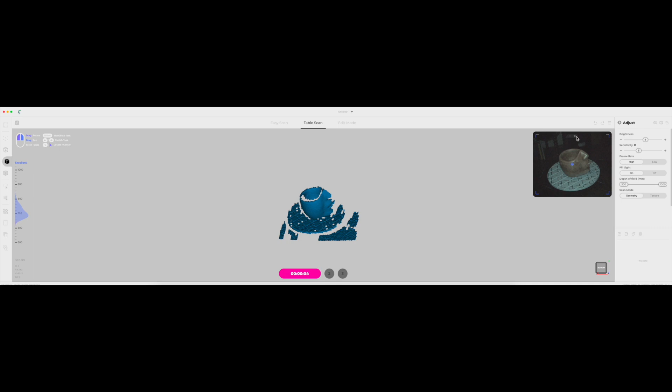All right, this is Creality's CR Studio. When you first bring it up, you want to go into Table Scan, then hit Preview. This will give you an idea of what the scanner is seeing. You want to go ahead and adjust your camera - you can zoom in a little bit, but you adjust the camera or the scanner until it fits right in the center of what you're scanning. So this gives you a preview of what you're looking at.

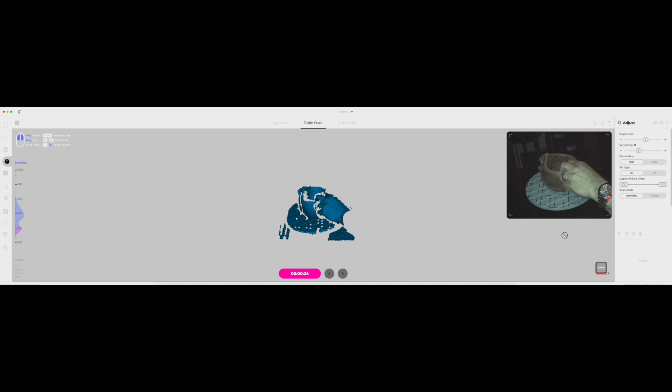Once you got that comfortable, you like what you're looking at, make sure it's centered on the turntable, then go ahead and click stop, or click the pink on the preview, and it will stop it. Then you reach over and take the object off the turntable, and then you click initial.

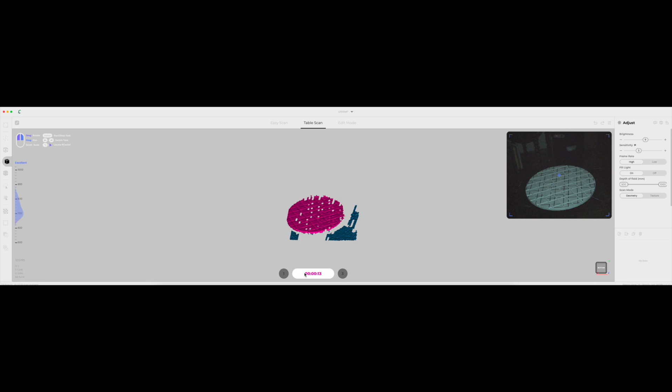What this does is scan the turntable and anything around what your object is. You want to run this scan for like 20 seconds - sometimes it'll do 10 seconds all on its own if it's got a good picture, it'll go ahead and shut off the initial scan. But if not, after 20 seconds you can go ahead and click on it and it'll stop it.

Then what you want to do is put your object back on the turntable, and now you're ready to go ahead and scan. So you click scan, and it'll do 320 frames of the object that you're scanning.

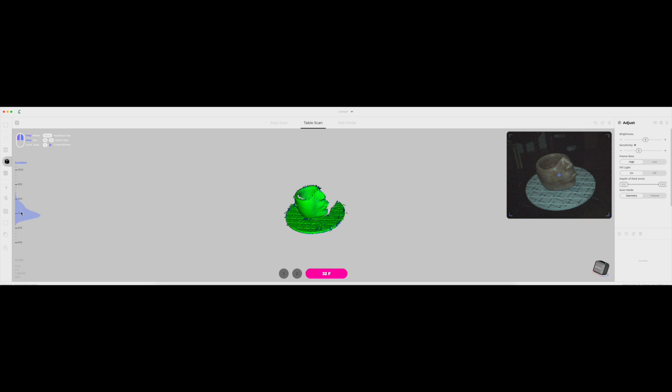Now, if you notice on the left, that tells you whether you're too far or too close. It'll say too far or too close, and then you just go over and manipulate the object until it's right where you have excellent. You do that during the preview process - that gives you a chance to get everything in place.

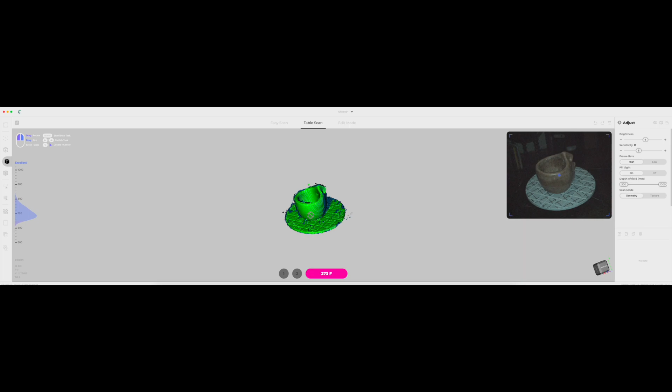Once you hit your 320 frames, you're done with your first scan, and it will stop on its own.

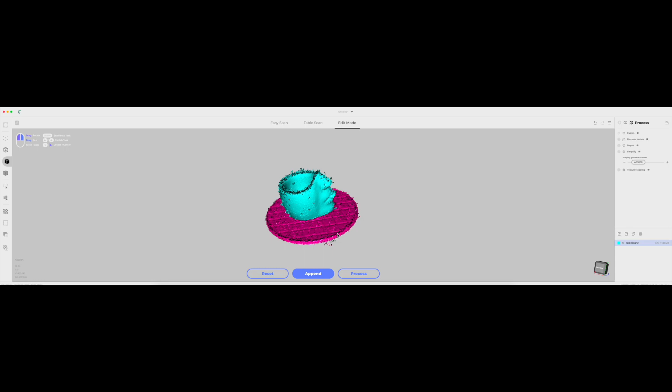Now we'll go ahead and process that scan. You can leave it alone and say I'm done, but if you have a complex object like I'm doing, where it has a void or a hole in it, you can click on append, and what that does is allow you to do multiple scans to pick up all the sides.

You can see as I'm tilting it, there's a hole in the bottom. Now we need to scan that, so we hit append, and it goes back to preview. You can go through the preview if you want and make sure everything's good, but then set your object kind of on its side, and then go ahead and click scan. What this does is scan the same object just in a different orientation.

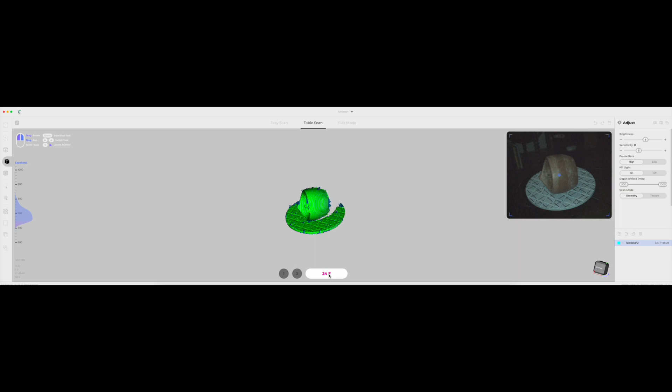Now you can see I got the object on its side, and now the turntable is going to start turning, and I'm going to do a full rotation, or 320 frames, of the object on its side.

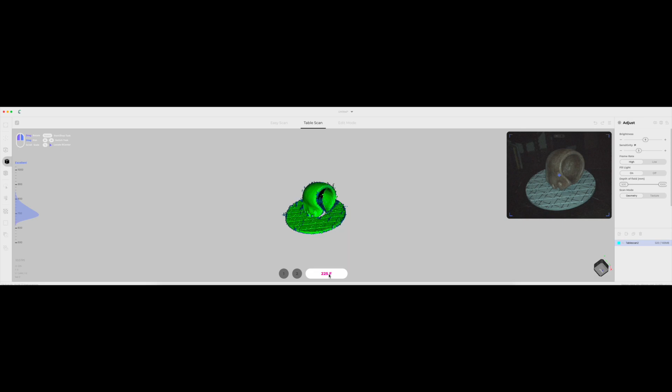Now you saw in the very beginning how I had the scanner up on a tripod kind of high. The problem is when you do that, you can see the top portion of this pot in that void - it's not going to get. It's going to get right here where the back of the face is, but it's not going to get the other side. So once you get 320 frames done, it'll build again.

Now take your pot or your object and flip it on the other side. The scanner, as it's scanning these objects, is pinpointing different areas of whatever the object is you're scanning.

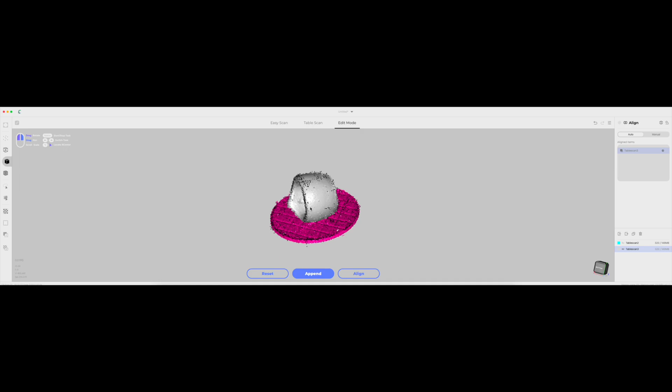And you can see now on the right, I have 2 scans. You can see there's a void at the top of that pot that it still hasn't gotten. So now I'm going to place the pot on the opposite side, and I'm going to do another scan.

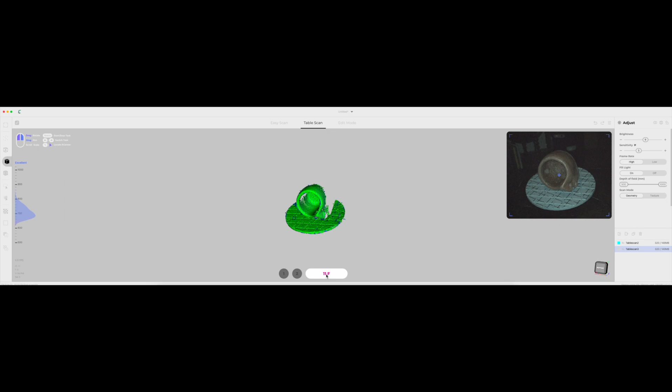So this will be the 3rd scan. The scanning software is going to pinpoint areas of the object, and then at the end you can combine them or align them. It's going to try to find areas that are consistent between all 3 so that it can align it and get all those areas that we're missing.

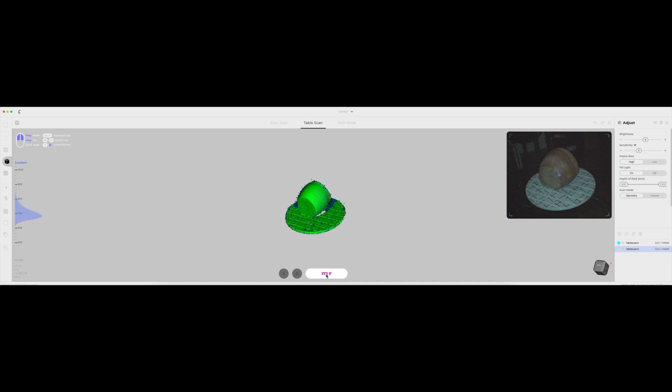So now I'm scanning the other side of the pot, and that void that was on the top is now on the bottom. It's actually a little bit to the side. So when it gets done with 320 frames, you'll see there's one little area that it didn't get, but it's going to be okay because we're going to use Meshmixer to fix that area.

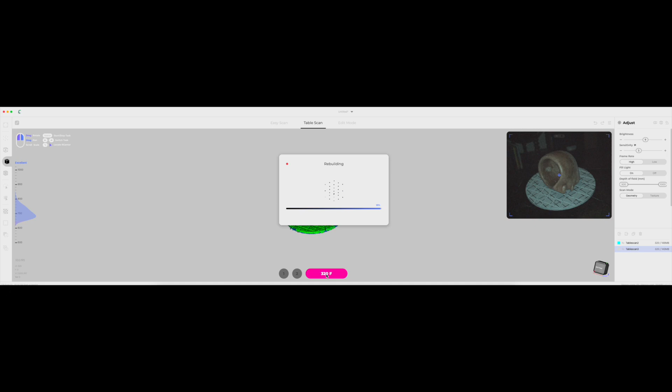So now this 3rd scan is done. It's going to go ahead and process it, and then you'll see over to the right we'll have 3 scans now. So now what I do is go over to the right and select all 3 scans. Now all 3 of them show up on the screen.

And then you can go ahead and click Align. Now this takes a while, so I'm going to go ahead and speed the video up.

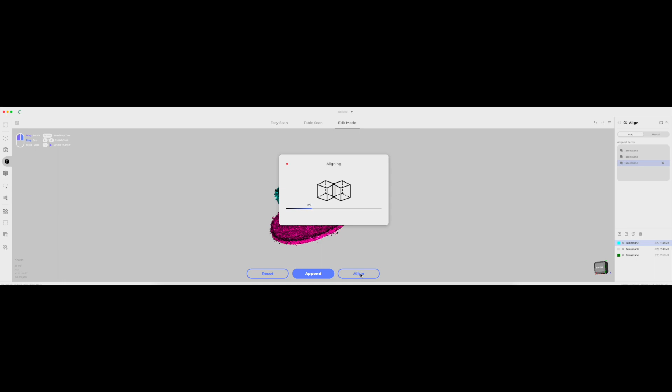All right, so now I have all 3 combined. You can see the turntable is in all 3. I could have done one more scan to get that last part, but I don't like to push it. So I have all 3 of them combined.

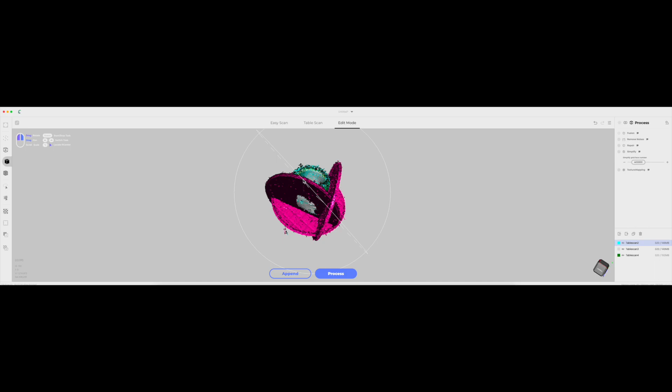Now what we want to do is process what we've scanned and get rid of all that extra crap that's in the scan. So with this...

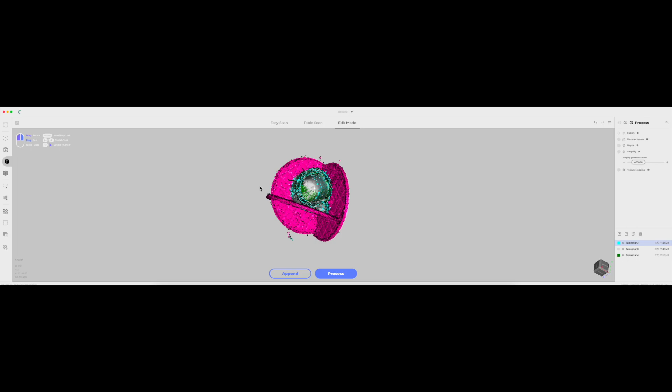There's an area over to the right, I got to find out where that's at. So you can see that little black spot - that's where the scanner didn't get. It got it on the outside, it just didn't get it on the inside.

But I think we're still going to be okay. That small area, we're going to be able to process it and fix in Meshmixer. But on the right hand side here, you have all the different processes that can be done. You want to go ahead and click on each one, except for the one on the bottom. It's kind of hard for me to see because I've got it on the video editor, it's really small, but you select all the ones except for the one on the bottom.

And then you want to go ahead and set that to 300,000. I set it to 300,000 because I use TinkerCAD, and TinkerCAD requires at most 300,000 - can be no more. So this thing by default is 400,000, I set it to 300,000.

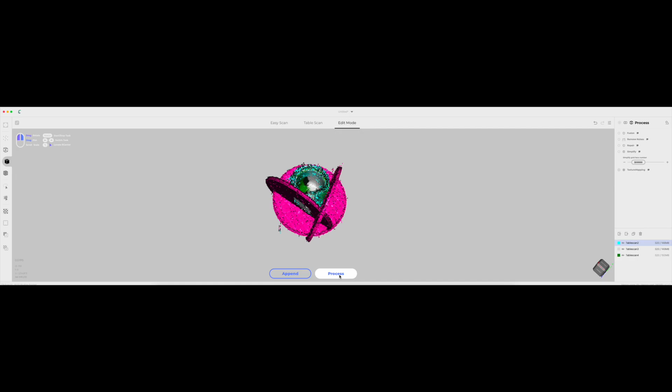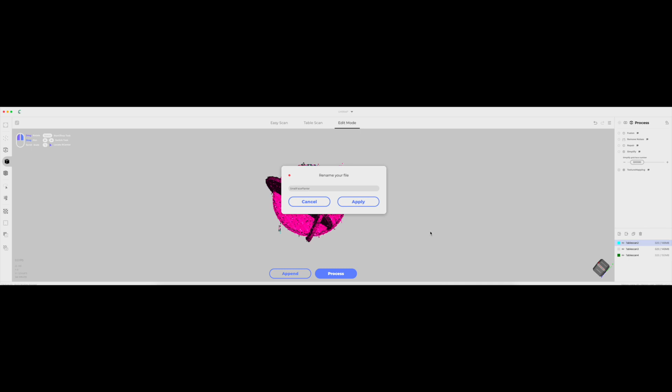Once you have all done, go ahead and hit process. This can take a while. You want to go ahead and give it a name, and this can take a little while depending on your computer, so I'm going to go ahead and speed this up. Once I give this a name, select - make sure all three scans are selected.

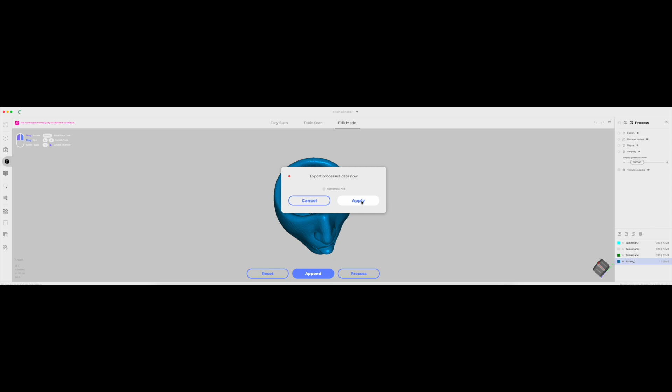So now once that's done, you want to go ahead and export it. I think by default it keeps doing it as an OBJ file, but I like doing STL. It really doesn't matter - the only thing is if you're going to use TinkerCAD, you got to make sure it's less than 25 megs, or it won't let you export it. I like using TinkerCAD because it's really easy.

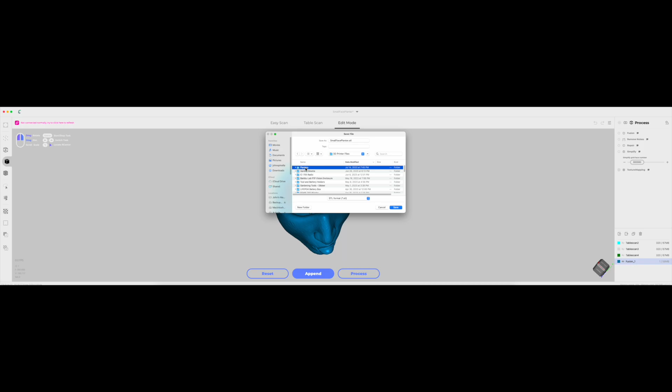I'm not all into AutoCAD and all that stuff. I'm just now starting to tinker with a scanner, and I pretty much got this process down. So you want to go ahead and export it, save it somewhere.

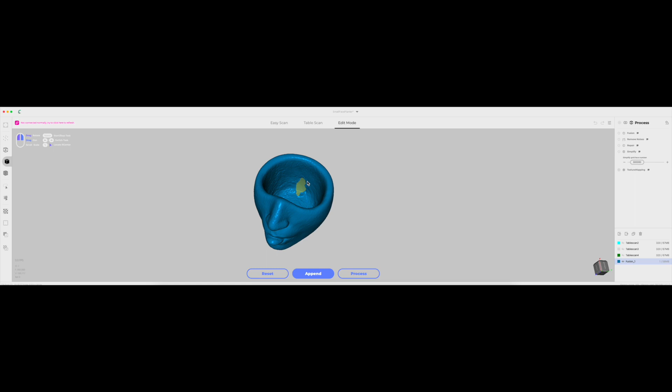And you can see that spot in the back - that's that area that didn't scan very well, but you can see we got a pretty good scan, except for that little area. I think this pot came out pretty good. So for scanning wise, we're pretty much done.

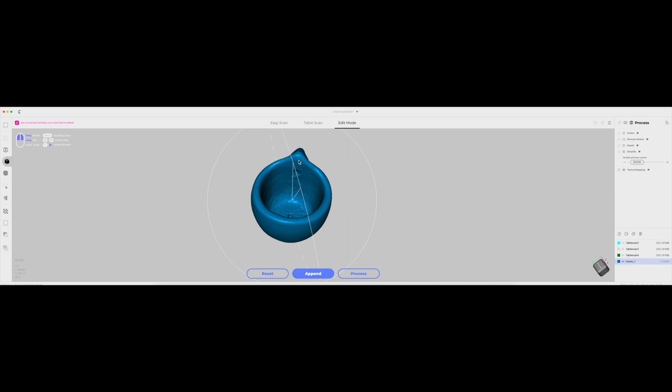The only thing we got to do now is put a hole in the bottom because it's a planter pot. And I also use Bambu Labs Bambu Studio for 3D printing. So you can see I have Bambu Studio up here.

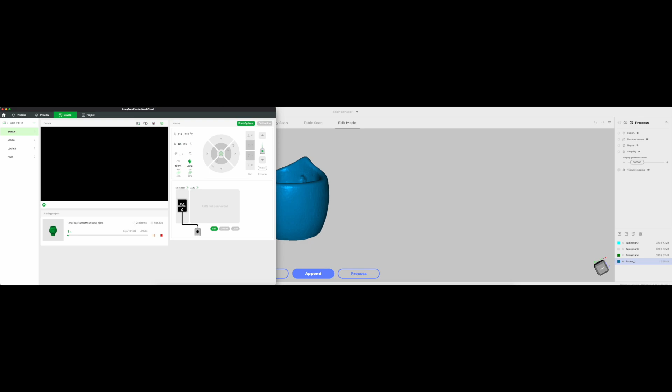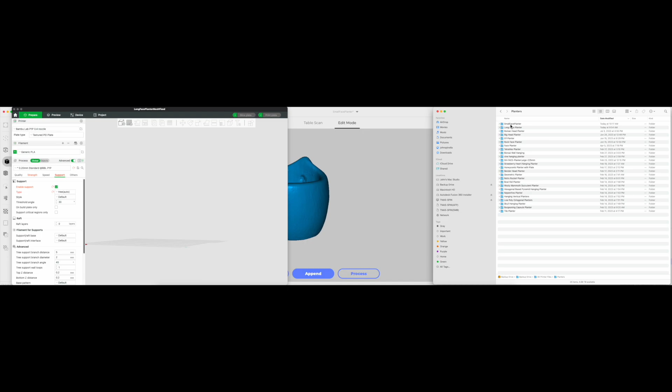And if I want to drag it into Bambu Studio, I can bring it in there and see how it looks. Hopefully you can see this - that's another scan that I did of a different pot. But if I go ahead and import it, bring it in there, and there it is.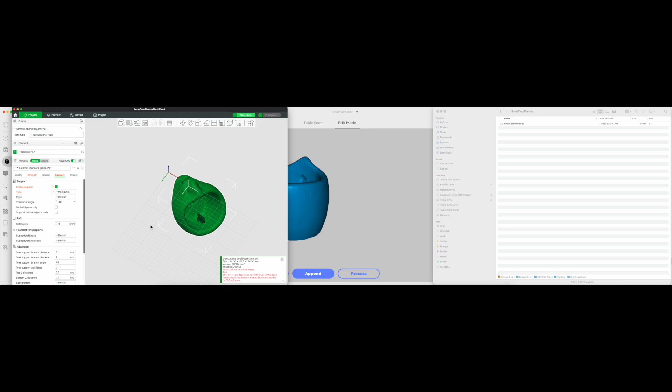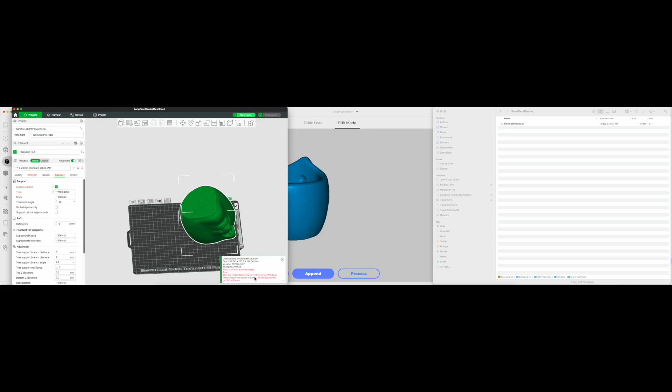Good idea to rotate it, get it on see there's the little spot in the back, but you can see on the other side it's solid. So I don't know how that's going to come out, but I like bringing it into Meshmixer and letting Meshmixer analyze it and then fix that problem for me. So all I got to do with this now is rotate it a little, rotate it back on the build plate so it's nice and flat.

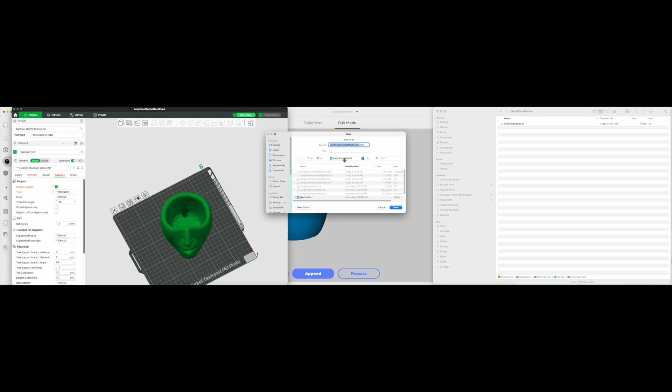Now I got it nice and flat on the build plate. You just want to go ahead and set up supports. I think this needs a little bit of supports. Increase the wall size a little bit, and then go ahead and save the project. That way, if I ever want to print this, I can just bring it right into Bambu Lab. It's all set up the way I like it, and I can just bring it in and print it. So it's not that big of a deal.

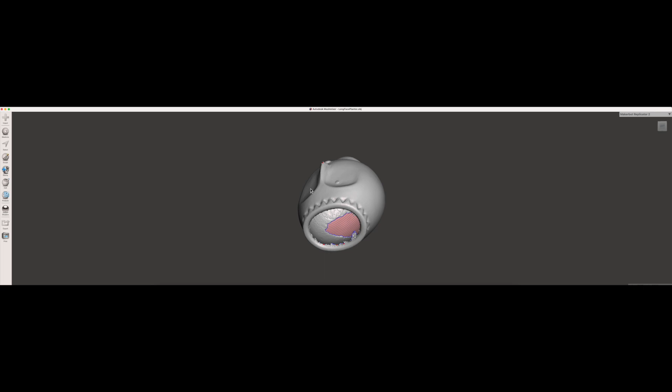But now let's go on to Meshmixer. So this is Meshmixer. It's so easy to use. I didn't even know this existed. But what you want to do is just import your object, and I'm going to import something different. Honestly, I imported this object in here and worked it, thinking it was the other file, but it has the same problem, an area in the back that I had missed.

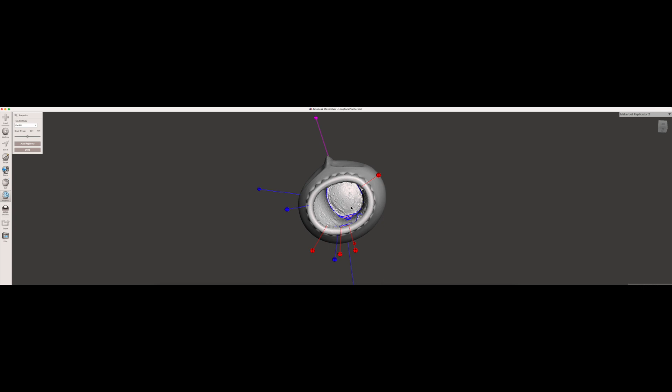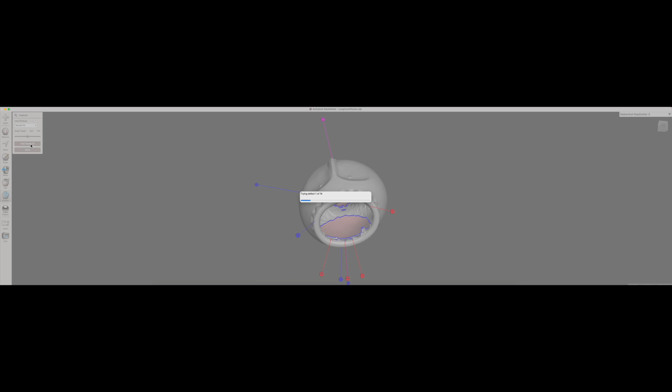And all you got to do with this is go down here to, I think it's analyze. I can't really see it. Let it find all the problems that it sees, and just tell it to fix it. And I tell it to smooth it out and let it go ahead and fix all the problems that it sees for me. I'm not a 3D CAD guy, so I really don't know how to do that. Doesn't take long to do it, and boom. Now those areas, they had holes. In this pot, those areas actually had holes in it. And Meshmixer went ahead and cleaned it up for me.

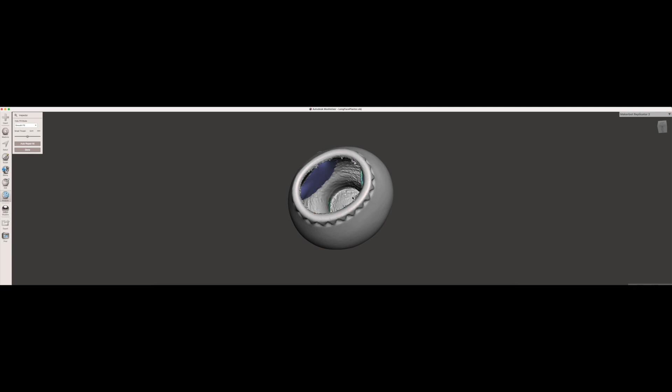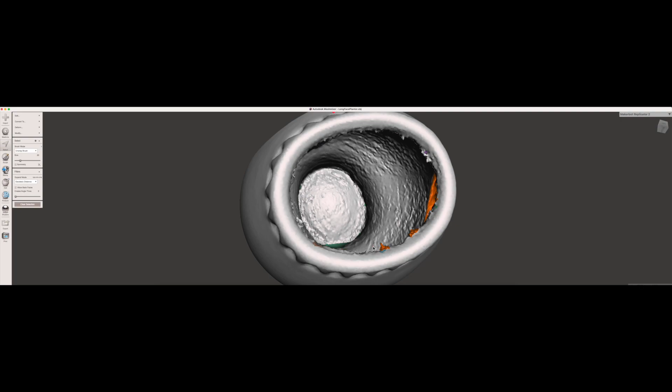Now the other problem I have is all these jagged edges around the top. The pot that I started this video on didn't have these problems, but I wanted to show you if you have these jagged edges, something weird that gets scanned. When you go into Meshmixer, you can select an area, shrink down the size of the pen or marker or whatever it is, select areas, and then tell it to smooth it out, to delete it, to remove it, and leave a smooth surface. So that's what I'm doing here, and smooth it out. Sometimes you have to do it a few times to get it smooth the way you want it.

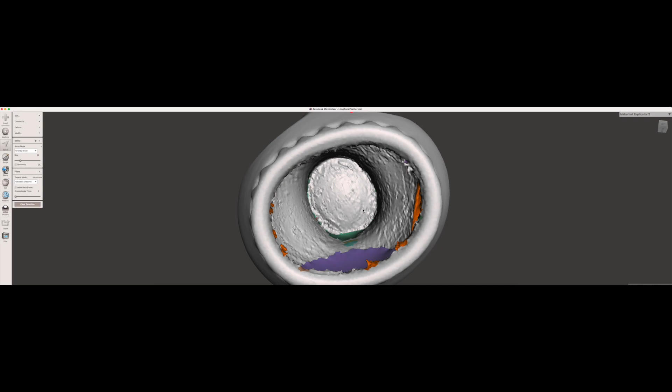And then you'll see that it'll eventually be a nice smooth edge, and you don't have those pointed edges. I don't know where those came from because the original pot did not have those pointed edges. But when you 3D scan, if it doesn't see it right, or if it sees something else, it'll drop in whatever it thinks it is. But the more I do this, every time I do this, it smooths it out a little more. I'll do it a few times, and then it'll be done.

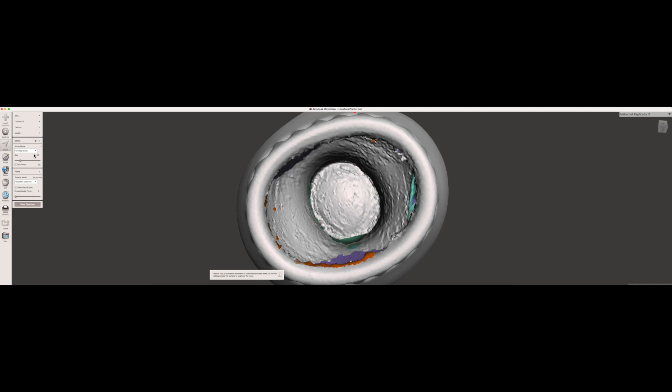I know anybody on here can critique all they want. I'm basically learning how to do this from the beginning. I've never touched any of this stuff before, so I'm sure there's some people out there that probably say, man, you're doing it the hard way. But to me, not being able to find certain things on YouTube to understand exactly what I needed to do, this was the easiest fix for me.

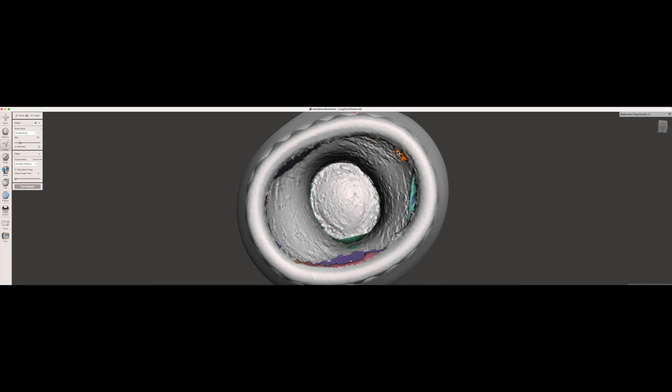And now I swear by Meshmixer. It's a great software for people who are really stupid at this process like I am.

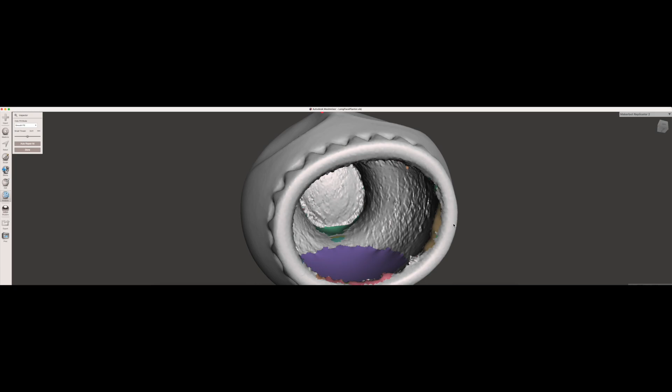So you can see now those edges have gotten smoother. There's still a couple jagged edges in there that I'm going to go ahead and clean them up too.

And then after this, I'm going to go into TinkerCAD. TinkerCAD is on, I'll put a link to TinkerCAD in the description. TinkerCAD is just a web page. It's free. You can do all kinds of stuff. It's very basic, something that I needed, something that was very basic. But it allows you to do some things. I'm sure you people out there that are really good at it can do some really complicated stuff, but most of it is really simple stuff for me to do the basics.

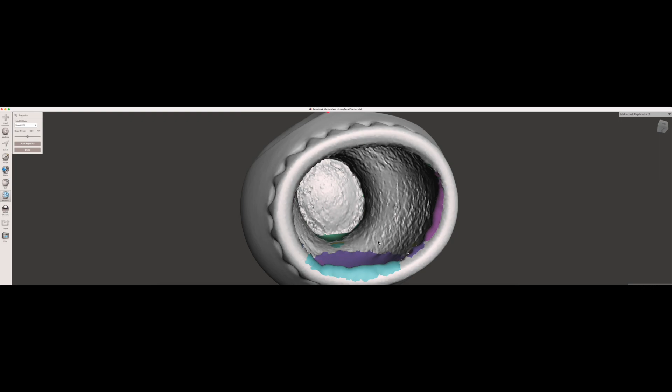But once I get done with this, I get everything smoothed out. I found a few more little edges that I need to get rid of.

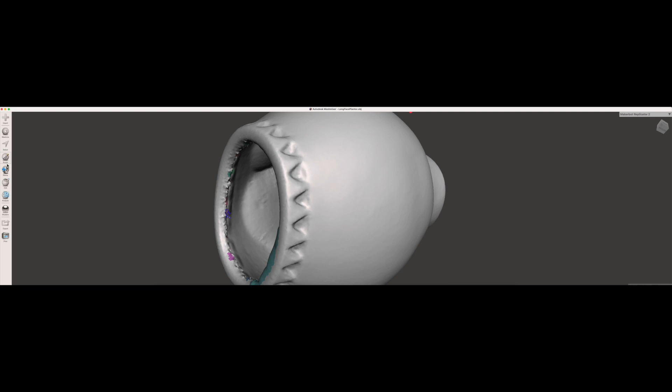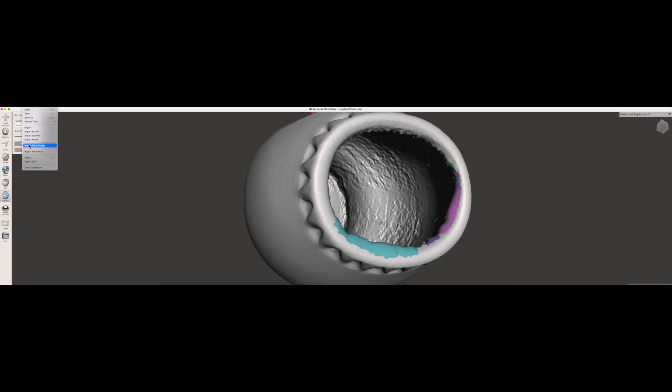And see, every time you do the analyze, it'll come up and tell you anything that's wrong. So I think that looks pretty good. I think on the nose, I found an area that needed to be fixed.

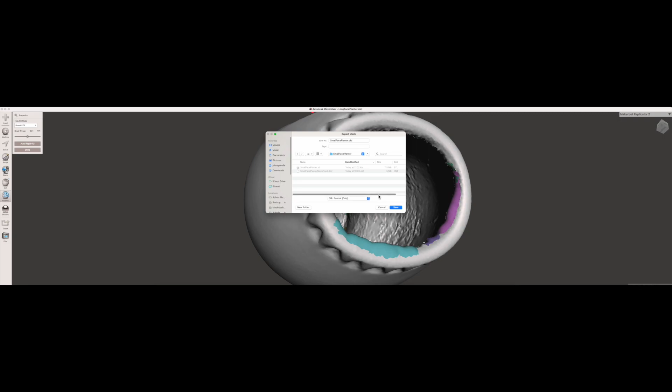I kind of did this video without audio, and now I'm coming back and commentating onto it. So I'm not exactly, and I'm doing it through this software, makes the screen extremely small, where it's really hard for me to see what I'm doing.

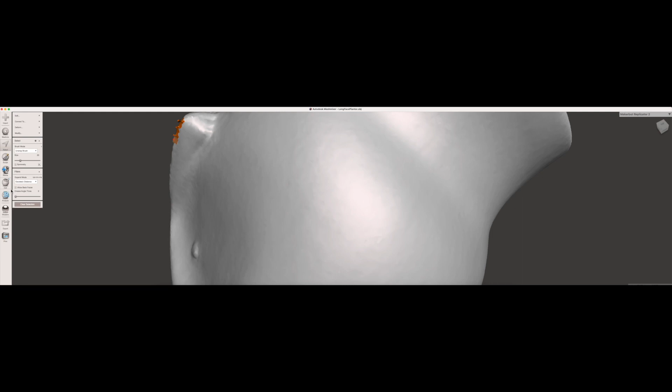But I know when I come to an area here, I'll see a problem with the nose. There it is. There's these little jagged edges on the nose. I'm going to go ahead and select those and then go right up the nose and then smooth that out.

And there you go. Now you have a nice smooth nose. Not too bad.

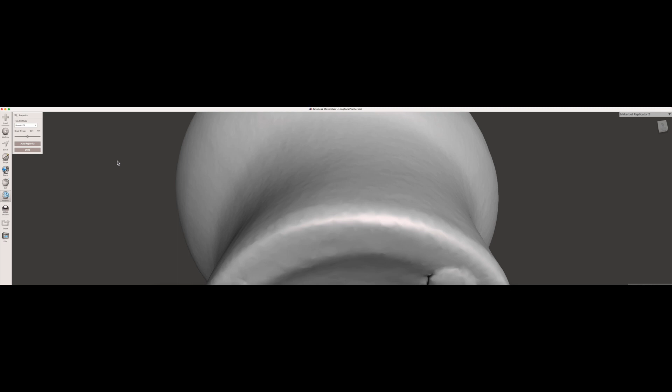So now that I'm done with that, I'm going to go ahead and export the object so that I can send it over to my printer.

I printed one of these and I still have a few things left to clean up this particular pot. It didn't come out exactly with all the seams lined up, so I'm going to print with random seams. I printed with 6 walls to give it some strength and 30% infill. I don't think I need that, I'm going to back that off.

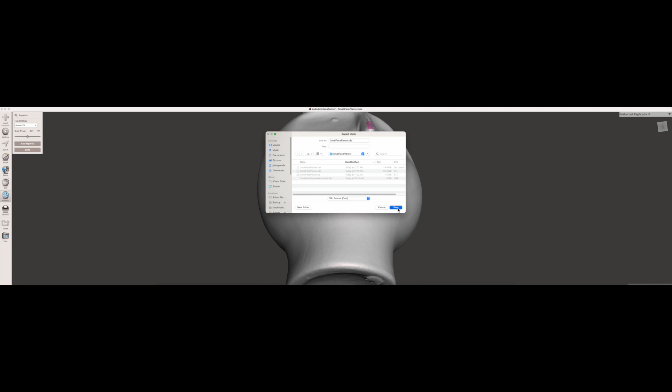But now let's go ahead and move on to TinkerCAD.

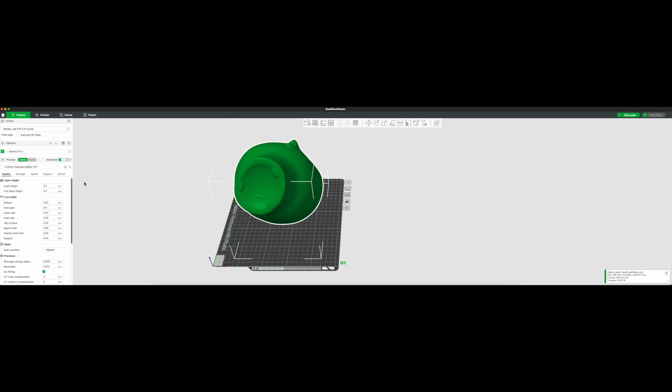Here I'm importing into Bambu Studio just to see what it looks like. And of course you gotta get it lined up on the build plate. All right, so now we got it in Bambu Studio. We can go ahead and slice it and send it to the printer.

And this is to print that other one. But that's just to show you that it started printing.

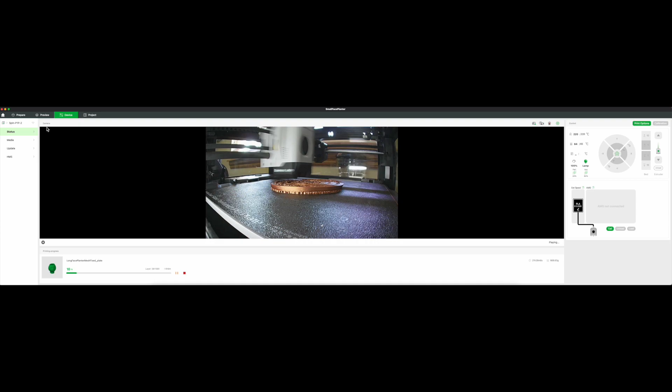And now I'm going to go ahead on over to TinkerCAD and show you how to put a hole in the bottom of that other pot. So this is TinkerCAD when it first comes up.

So now that we have TinkerCAD up, all we got to do is come up and import. It's got to be less than 25 megs and less than 300,000 geometric shapes or something like that. So when you do your scan and compile and process it, you got to make sure you're 300,000 or less. It takes a little time for this to come up, and then we'll be ready to show you what's going on.

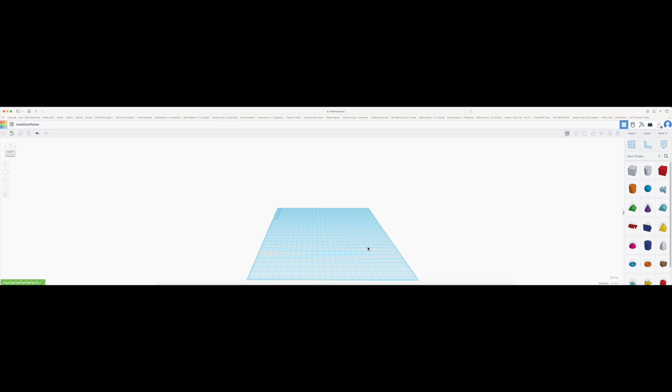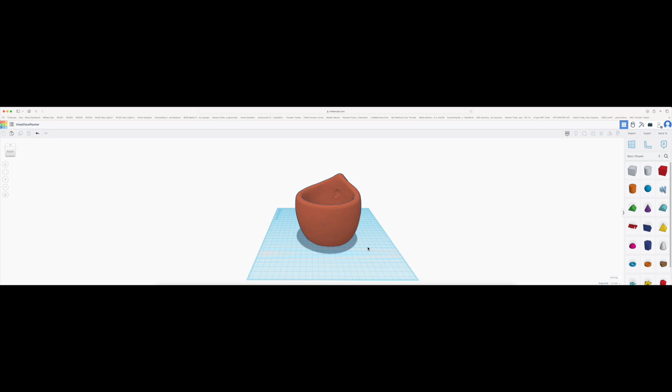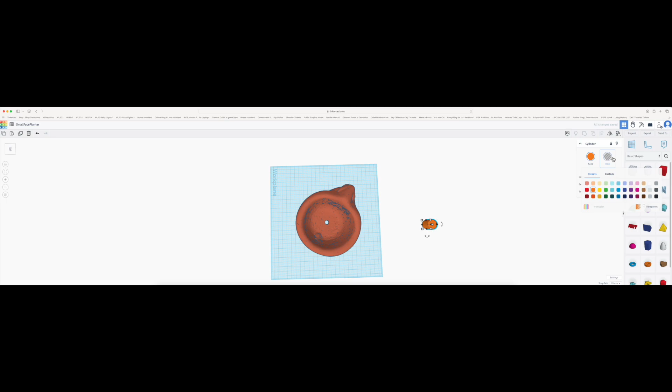Once you get your object in there, you determine where you want to put your hole. Obviously, I want to put it right at the bottom. This is a flower pot, so I want to be able to have a drain. So you go over to the right and select a round object and make sure you have it set as a hole - you can have a solid or a hole. We want a hole. Then you line it up where you want it and set up the size.

Now, every time you bring something into the plate, it starts at the bottom, it starts on the plate. So you have to determine where you want it. Because I want this to go through the object, here I'm sizing it down to, I think it's 5 or 10 millimeters, I can't really see.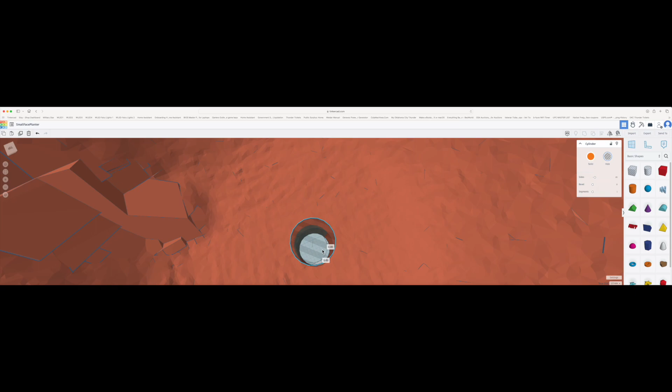Then you want to go ahead and center it where you want it. I want it right on the hole, or right in the middle of the bottom of the pot. Now it sits on the plate, but I want to make sure that it goes all the way through the pot.

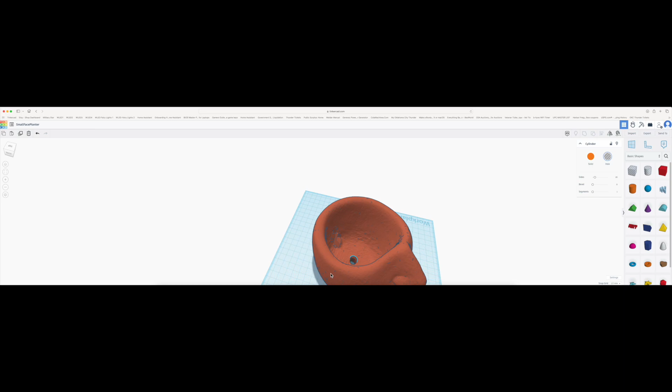So if you turn it on its side, you'll see that little teardrop at the top. You can bring it down under the plate. So now I have it thick enough to go through the top. It shows up through the top of the hole or the base, and then it also shows through the bottom of the base. So it's all the way through.

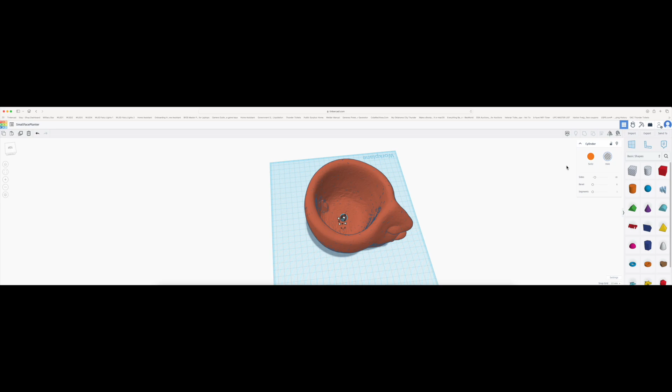And then all you got to do - I can't really find where the select all is - but you can hit Control A or Command A for a Mac, and then select Group, or Control G or Command G, and then wait. It takes a little bit to finish. You'll know it's done because now it's all back to blue and everything's all one piece, and you have a nice hole in the bottom.

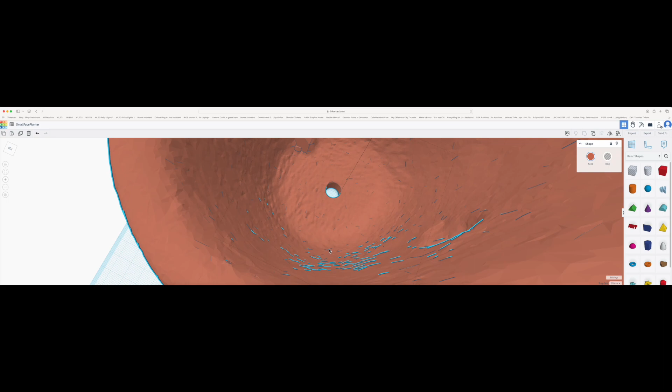So what I'm going to do now, I want to go ahead and export this to a STL file. I accidentally hit import - select STL, and it automatically downloads it to your downloads.